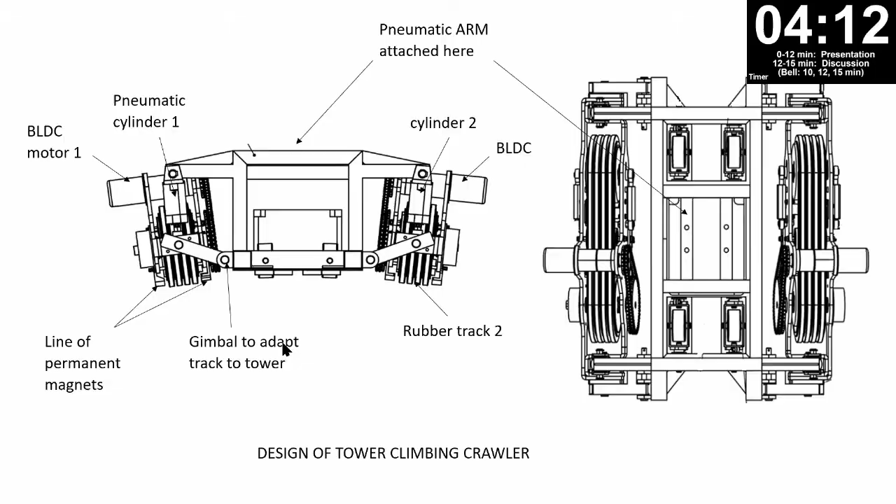That's our construction of 4 robots, and we have tested them on the ground to make sure they all move in a straight line, simultaneously, with the same trajectory.

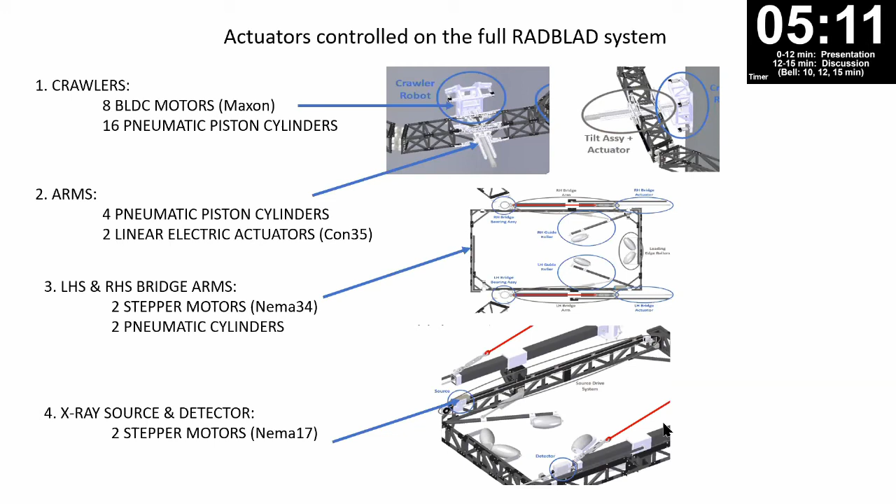There are lots of actuators carried on board the robot. The crawler has 8 brushless motors and 16 pneumatic cylinders. There are 4 pneumatic piston cylinders, which are the arms. There are 2 linear actuators which rotate these arms by plus and minus 8 degrees in the horizontal plane to orientate the crawler correctly. There are two stepper motors which open and close the right-hand and left-hand side of the bridge arms, and two more stepper motors which move an X-ray source on drive systems — belt systems here, source here, actuator here, detector here.

So that needs to be controlled, and we need to try to minimize the umbilical because you're climbing up to great heights, 30 meters or more. Therefore it's important to keep the umbilical as small and as lightweight as possible.

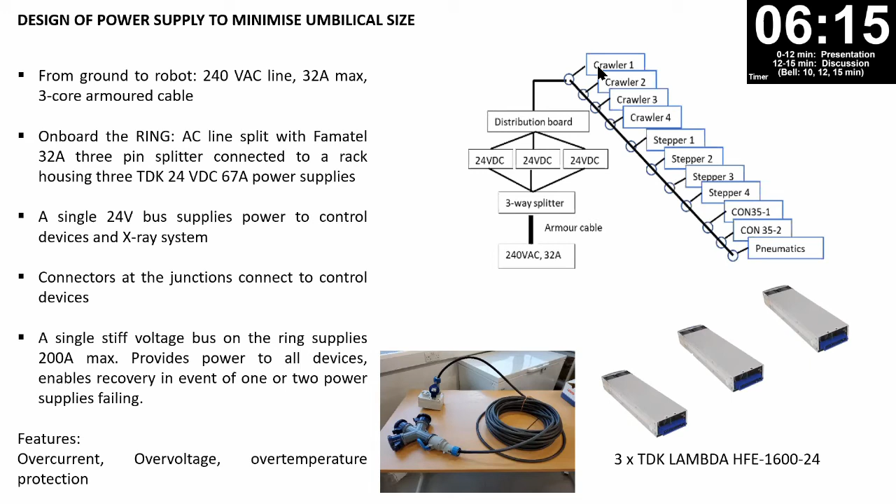Our approach is to provide the DC voltage that we need on board by using a 240 volt, 32 amp power line, shown here as an armored cable, then a three-way splitter, which splits the voltage and supplies 3 TDK power supplies, each giving out 24 volts DC and 67 amps. These are put in parallel to a distribution board, giving us a 24 volt DC bus able to supply up to 200 amps to meet the requirements of all the devices.

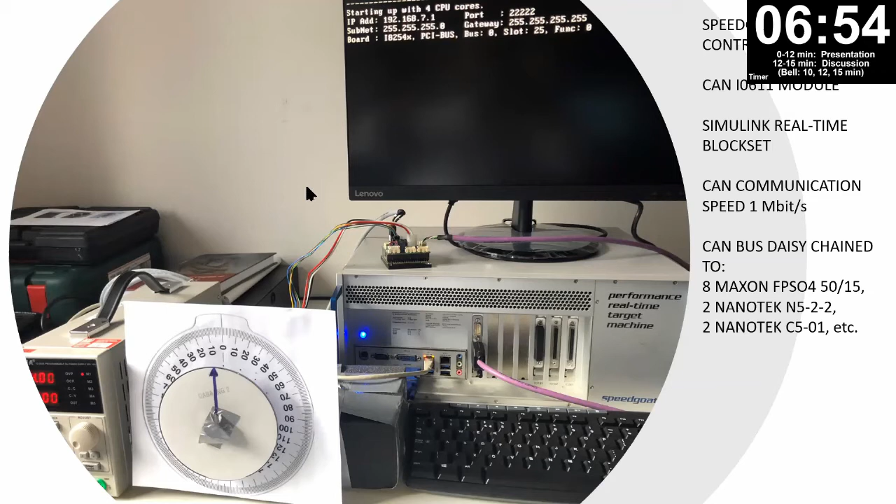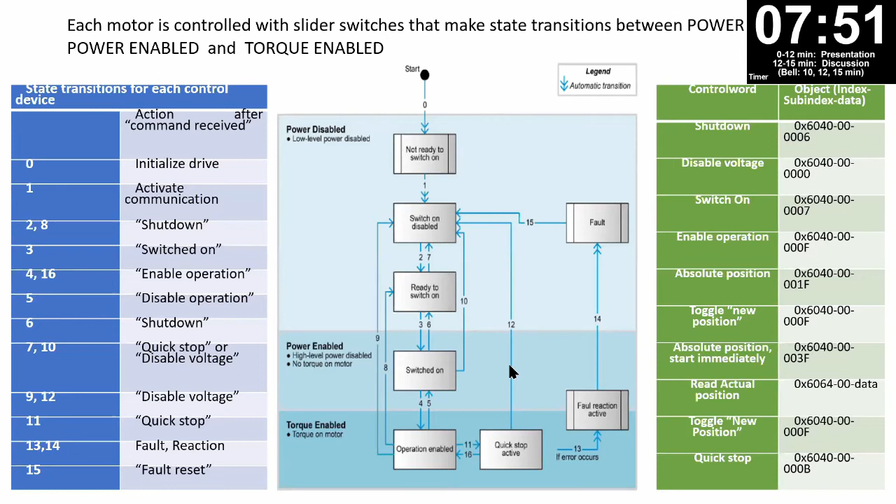The state transitions involve sending CAN commands to disable power, then go to a power-enabled state, a pre-operational state, and then an operational state which applies torque to the system. You can return from any state you're in to any other state you desire, plus a quick stop active, quick stop control, and fault reactions. All of this is encoded with the CANopen protocols. The command to shut down, for example, is that, and these have to be worked out very carefully for all the different types of commands you want to send.

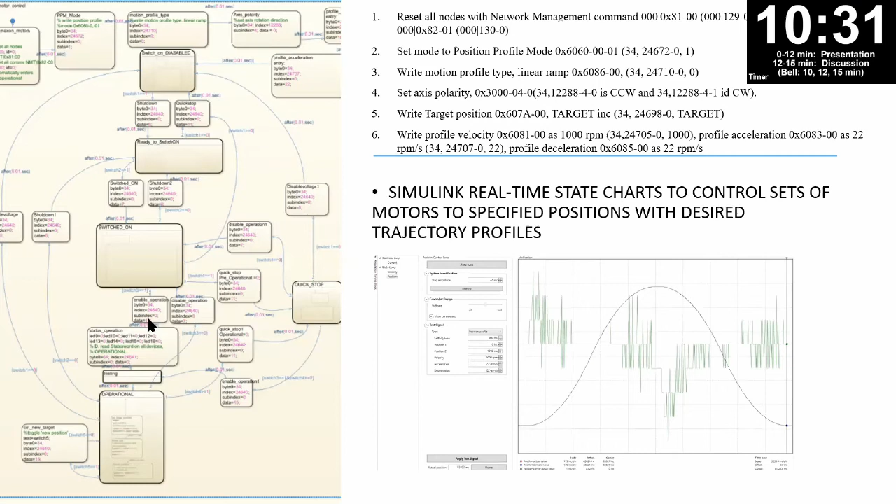In this case, we specified a trajectory with the acceleration and profile velocity while the system is moving to reach the target position. Here the target is 1,000 increments, and there are two curves: one is the desired trajectory computed by the control devices, and one is the actual. There is very little error - this green bit is the error, but the scale is 1 increment per division, so there's not much of an error. This particular profile is used on all the devices.

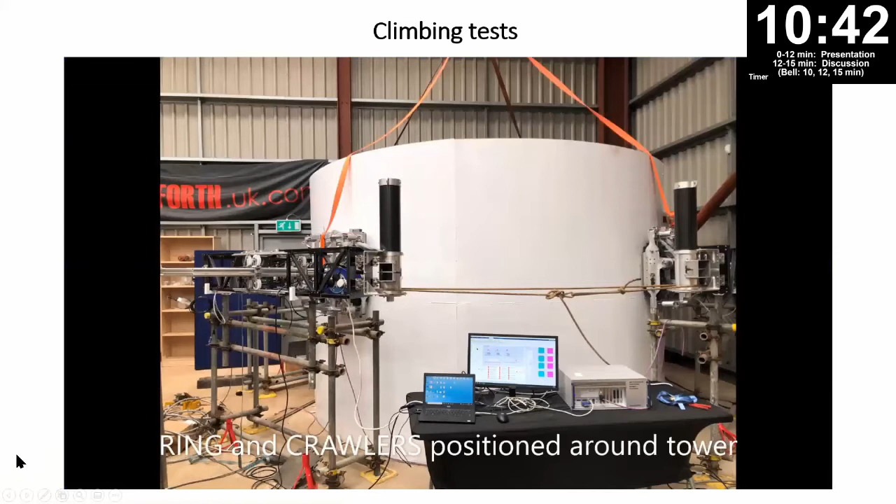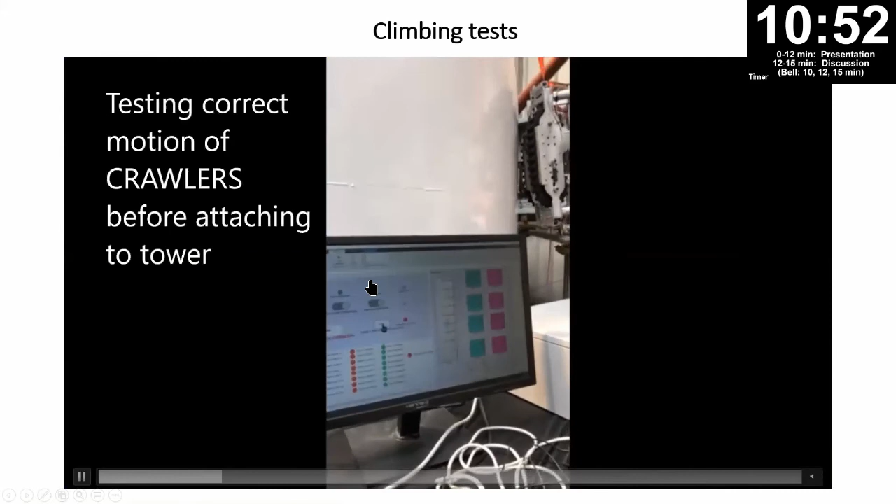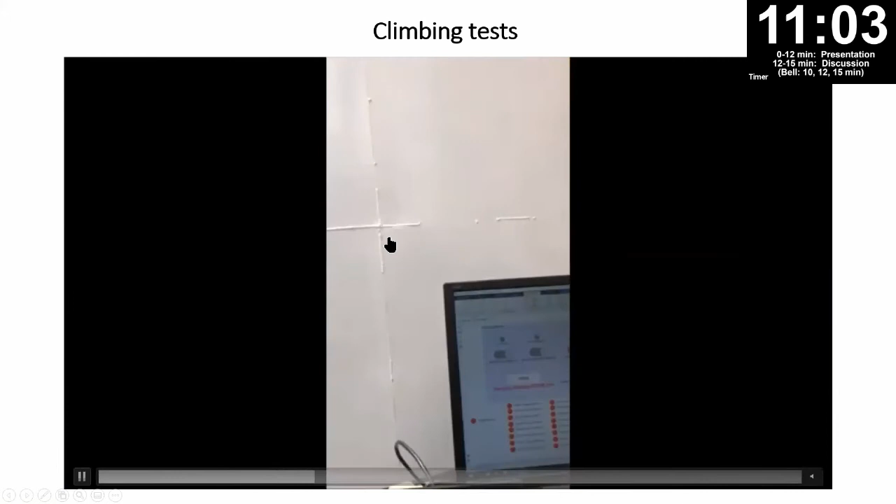Here is simply a video of a test that we performed. There is a mock-up of a tower, 3.2 meters in diameter. This is our GUI talking to the target system here. We first test to make sure that all the tracks are rotating in the correct way. Since there are 8 tracks, you need to be sure they are all going to move in the same direction.

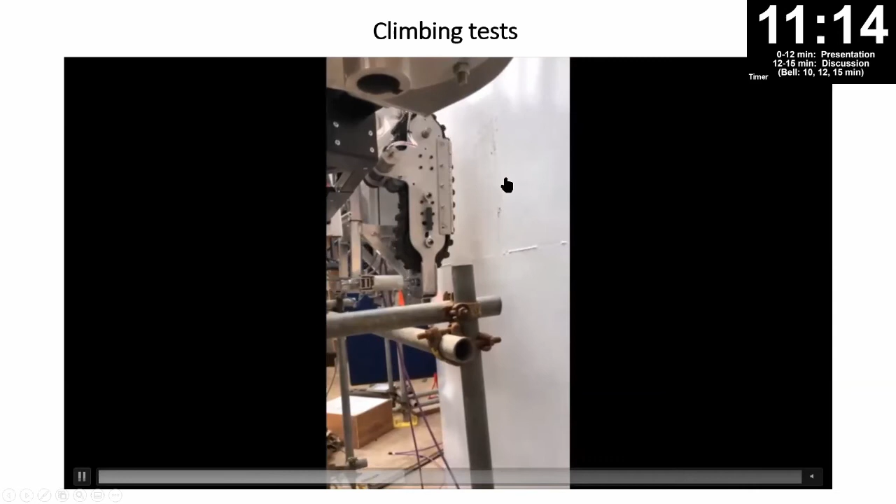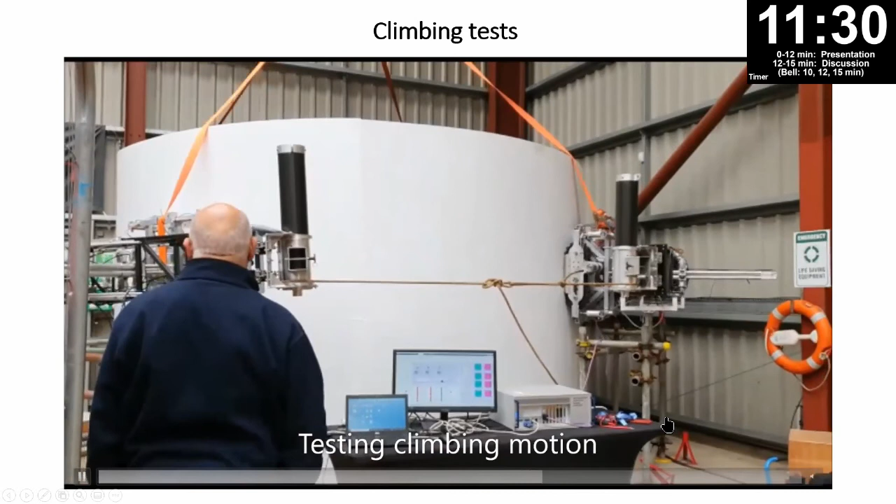And then we do the actual test to climb the machine. Now the bridge is missing here because Forth Engineering had dismantled that because they needed space for something else. So we are only testing the ring being picked up and climbed, and we are climbing short distances at this stage, just 200 millimeter positions. If you watch this point and that point as reference points, you can see that it does climb, and it maintains its position till we are ready to bring it back to rest on this scaffolding. This is the resting point.

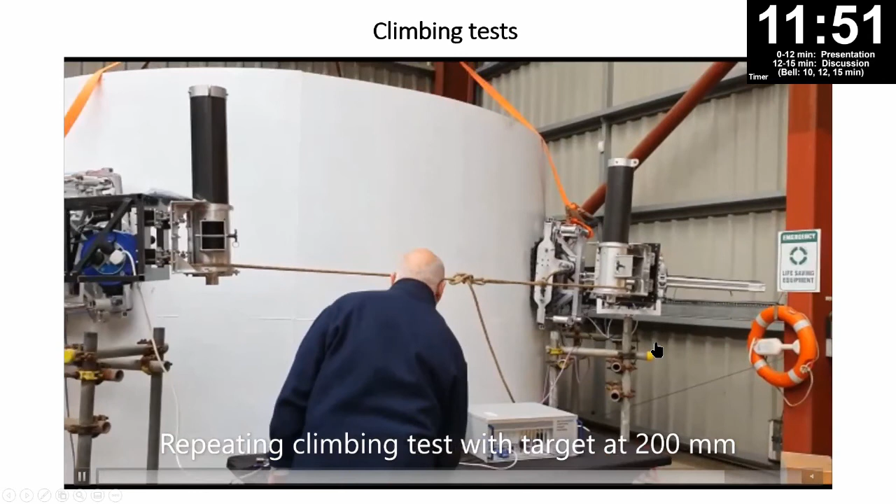In conclusion, the aim was to develop this lightweight, easily transportable modular climbing robot, which could be taken offshore to a wind turbine tower and assembled quickly around it. We attempted to minimize the umbilical weight and size by using a CAN bus, so it's just a single cable, one for power and one for communications. We've tested all the control systems. There are 14 electric motors, 22 pneumatic actuators, etc. So all these have been tested, and the climbing capability of the robot has been tested initially on a mock-up of a steel tower.

We have a parallel partnership which is doing work to develop a portable X-ray system, image detection systems using machine learning, artificial intelligence networks to automate defect detection, but I'm not reporting that here. We will take this thing to a 30-meter tall training tower in Blyth to start testing this in earnest. Thank you very much.

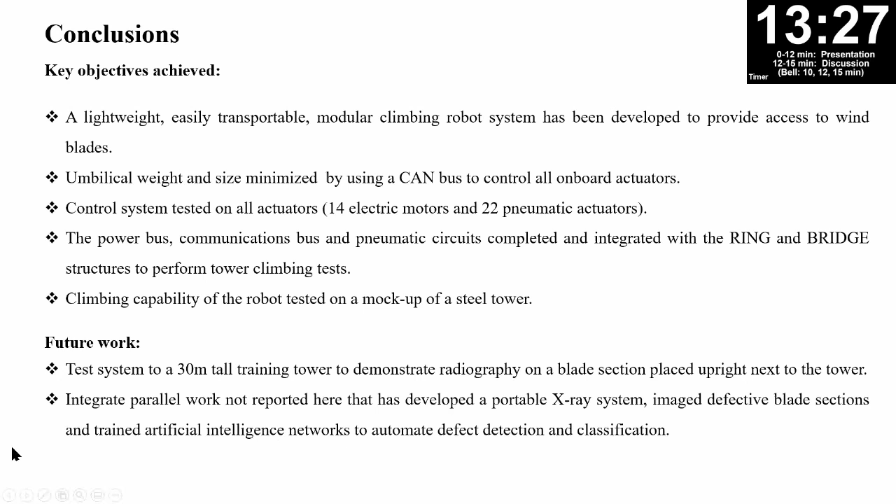Well, hi, Tariq. Hi, it's Clive Lachlan here. Hi, Clive. Yeah, very, very interesting presentation. Thank you. It looks like a really good, fun project.

I've got a few questions, and the first is, why did you opt to go for a system that crawls up the mast as opposed to sending up a lightweight structure, then winching the platform, the inspection platform, up?

Well, one of the reasons is that not all turbines have these winching systems in the right place. Some of them have it on the other side where the blades are, so you cannot always use a winching system. So here is a self-climbing system. That was one reason. The other reason is you can distribute the load of the whole system around the tower, which is helpful because we can put things like the TDK power supplies on the other side of the bridge, and that gives us a balanced mechanism. It could be improved - I have ways now, I've thought of ways to distribute the load in a better way. So that is one reason.

Fine. And also, you've opted for CAN bus. Have you considered wireless communications? You know, so you just had to have a power cable going up to the system.

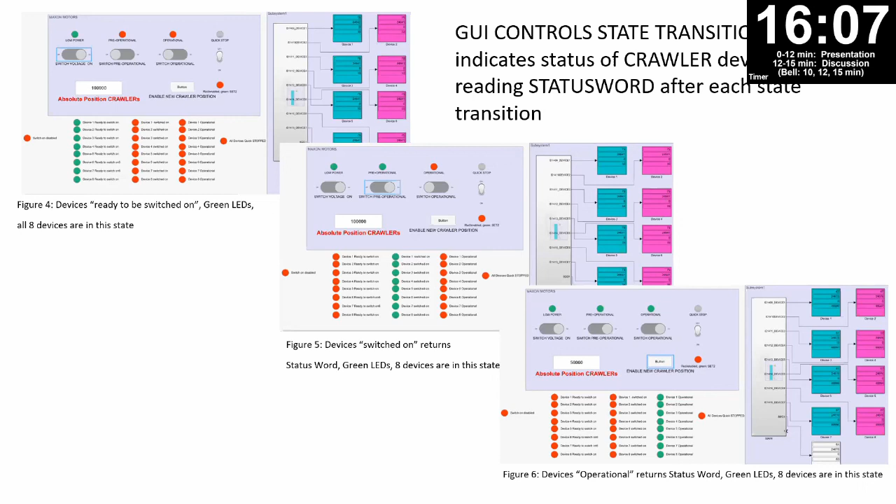And we are not relying on the magnetic system. We found that afterwards it's really a hindrance. What you need is to have the arm that I showed you earlier, simply pressing down on the thing. We are operating these pneumatic arms at 8 bars, and they apply a huge amount of pressure, so you get traction on the rubber there very well.

Yeah. Fine, very good. Thank you very much. Thank you. All right, thank you.